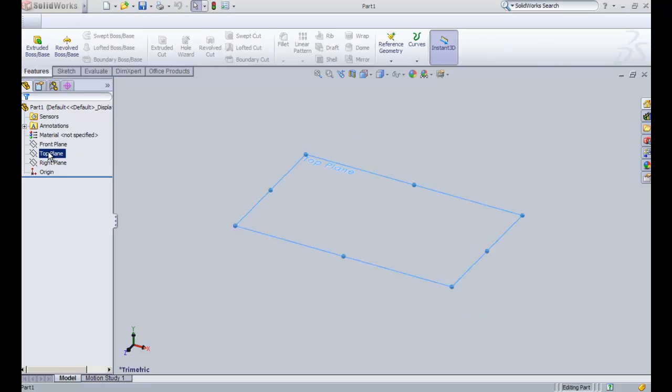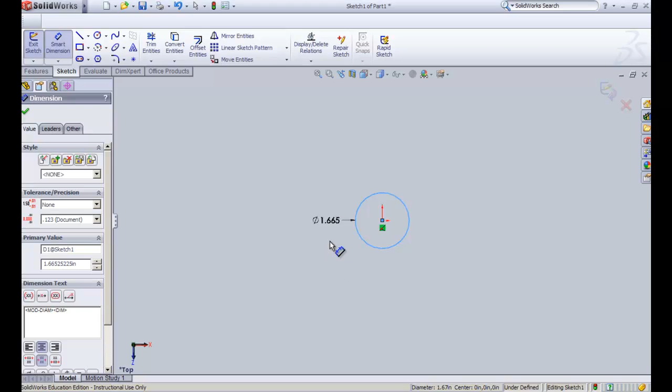To start off this spring, we're going to have to create some geometry to give us a base for our curve, which will be a helix. We're going to start with the top plane, and we're just going to create a new sketch on that. And this is where you're going to put a circle in the middle. And that circle needs to be the diameter of your spring. If you take the outside diameter of your spring, this is what we're going to measure that to. And I'm just going to use a made up number. And then once we have that, we go ahead and we exit the sketch. That's all we need right now.

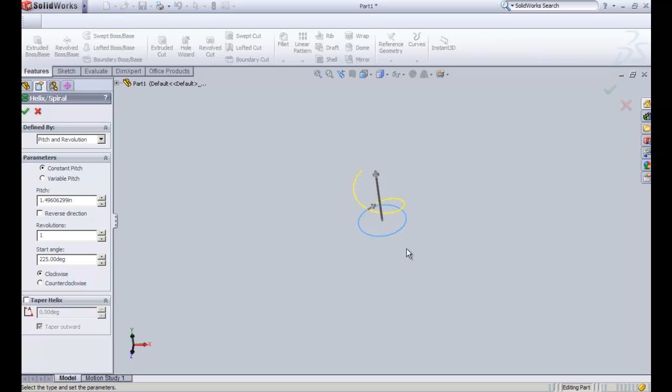The next step is going to be creating this actual curve. So if you go up here on the features toolbar and you hit curves, you're going to go down to helix and spiral. And you'll notice that it takes our sketch that we just did and it starts to put in a preview. Let me turn it a little bit. You can see where it's starting to do this yellow preview of where our helix is. Now we need to use a variable pitch. So we're going to switch this to variable pitch. And it gives us our starting and where we're ending.

And what you'll need to know is how many coils you have, how many turns around, and that'll give you the information for the revolutions. And then the diameter is going to stay the same because we have the same diameter all the way up. The pitch is the distance between those curves, the distance between the actual revolutions. If your first set had, let's say, 4, so you would go 0 to 4 is going to have the same pitch. The diameter will stay the same, and if you look in the preview, it all of a sudden gets really big. But this is a tight pitch.

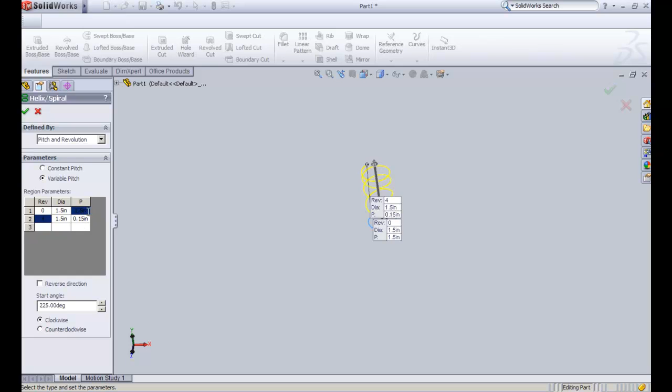So the distance between your revolutions is going to actually be just a little bit more than the diameter of the wire that's used to create the spring. So if the wire that's being used is, let's say, 0.1, we're going to do a pitch of 0.15 just to give ourselves a little bit of space. If you'll notice, it gets relatively small. Now it only changed the end, and that's because we need to also change the pitch at this 0, because 0 is also being defined by that same piece. And so if we change our view here a little bit, you can see now I have very tight. I have 4 over here, I have 5 over here. That's okay. If your spring isn't exactly like the one you have, that's okay.

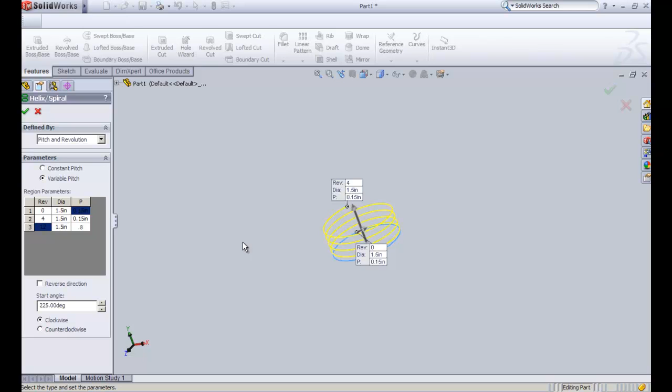Now we need to go to the next set. So our next coil will be however many you have of the wide ones. Let's say you have 8 wider coils. So we'll say we're starting on 4, so that's going to take us to number 12. The diameter will stay the same at 1.5, but this is where the pitch will be the distance between those wider coils. So we'll say we'll go like 0.8. And then we'll zoom out a little bit, and you can see right there we have from this one to this one, we have our wider pitch.

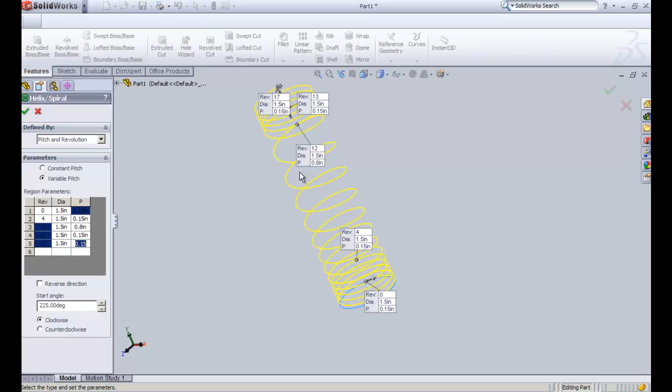Now we need to define the other end. So what we can do is we can say from revolution number 13, it's going to be 1.5, and we're going to go back to our original pitch, which is 0.15. And then we're going to come back, and then we have 4 more of those. So we'll say to 17 at 1.5, and it is 0.15. And so there at the very end, you see the tight section. Okay, so there's our coil. Once we're done there, we say OK. Okay, so now we have this helix.

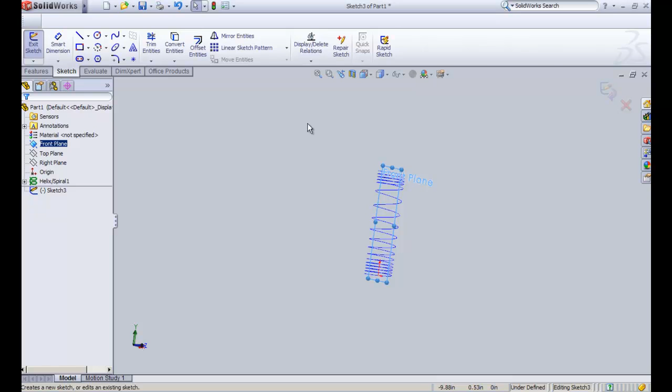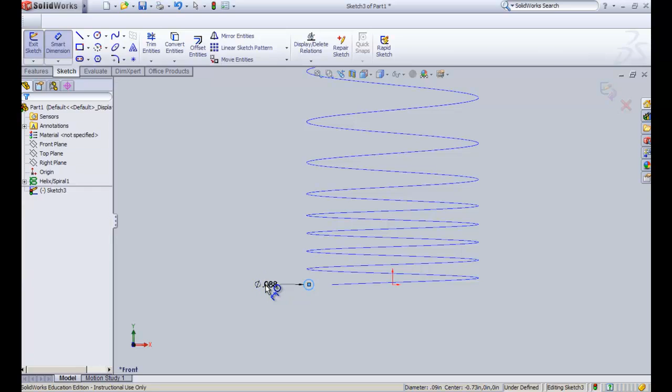And what we need to do is create the solid. We're going to come over here, we're going to choose the front plane, and we're going to draw a sketch on this. And I'm going to give myself a view that's normal to it. And I'm going to zoom in down here. Now what we want is a circle that is the diameter of the wire, and that circle needs to be out here where the wire would be. So I'm going to dimension this, and I think I said that was going to be 0.1. So I'll place my 0.1. And what I can do is I can give myself a dimension from there to the center. And this dimension would be half of what my coil is. And since my coil was 1.5, I'm going to say that this is 0.75.

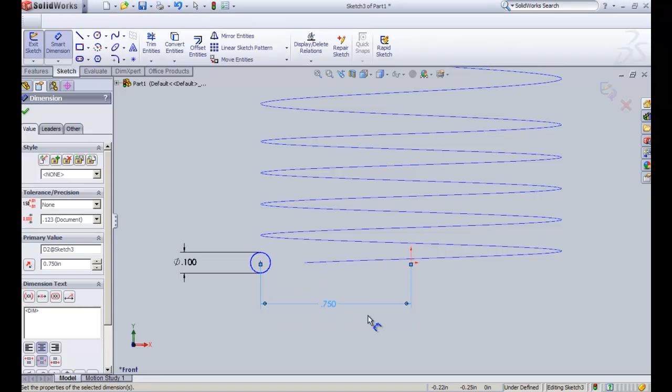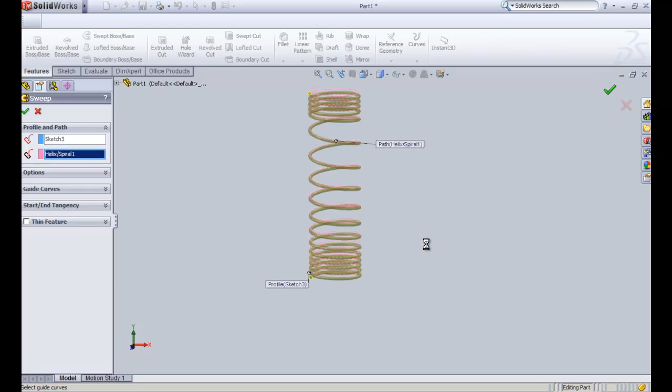Now I'm going to go ahead and exit this sketch. And now I need to sweep my circle along that path. So I'm going to go swept boss, and it's going to choose my sketch that I have, and then I'm going to click in here to choose my path. And I click on my path, and then I say OK. And there's my spring. And that's how you make a variable pitch spring in SolidWorks.